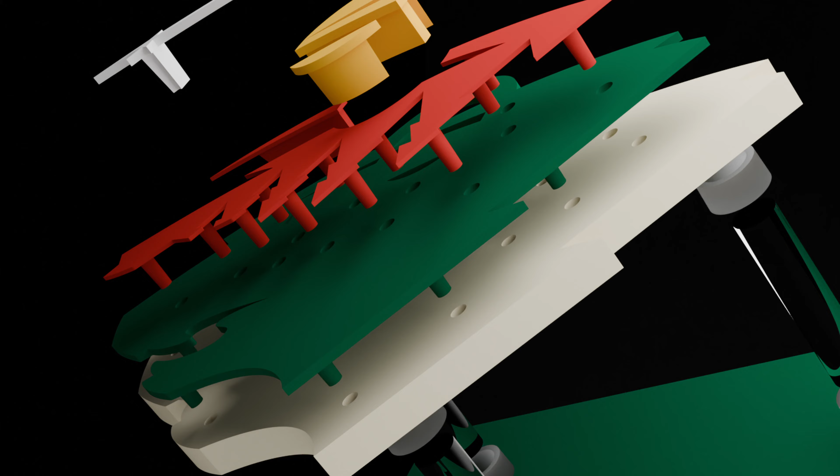Welcome to part 5 of the floating logo sign tutorial. This will be the last part of the series.

There will still be other videos that I'm going to make after this to do some other examples of the design. Those may be a little faster paced, and I'll point out anything that's good to know with more complex designs. Obviously, this one's pretty simple, and I chose it to be that way just for the initial tutorial. But I will do a couple more that are a little more advanced just to show you more of the thought process and the workflow.

You can go through the first videos to get a better understanding of where we're at, but this will still be a good standalone video for any design going from Fusion 360 to Blender for rendering. So we will get started with the actual exporting in Fusion 360. Before we do that, we've got a couple more things to do.

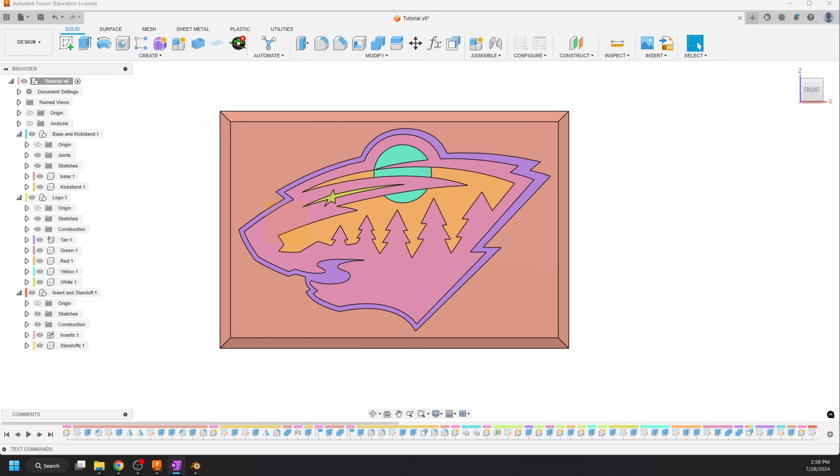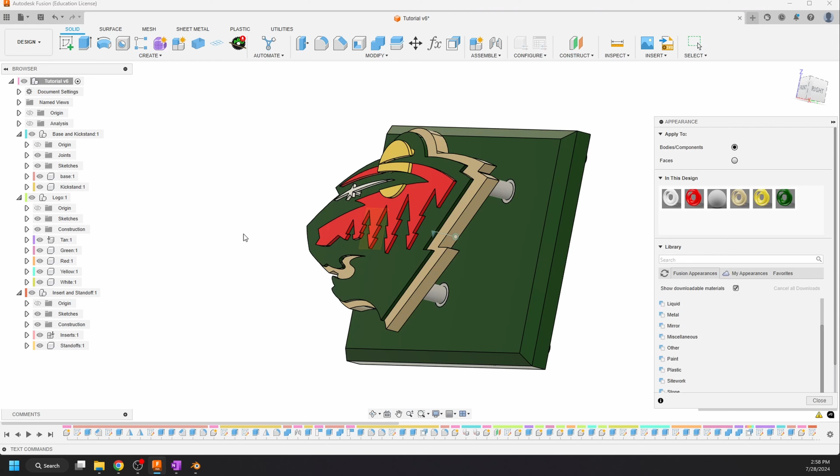I did go ahead and design the standoffs and the inserts for all of the holes. That way they can be exported into Blender as well and be part of the render, just to make it look a little nicer. So since we added those, let's go ahead and add the appearances to those so that they transfer over to Blender. So we'll hit A for appearance.

And you can see over here where I made the insert and standoff component. Within that component, I have a couple of parent folders in there as well that hold the individual bodies. And that way, again, I can drag the material over to the entire folder and it will apply that material to all. So we can go to Fusion Appearances.

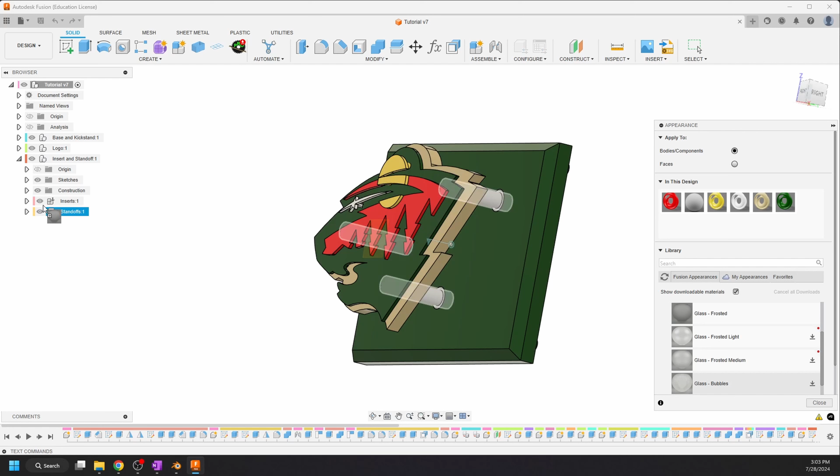And it does not matter at all what you choose over here. We can do glass frosted for the inserts. Really, you're just looking for the name to transfer over, and that way it keeps track over in Blender, which you'll see more what I mean when we get there.

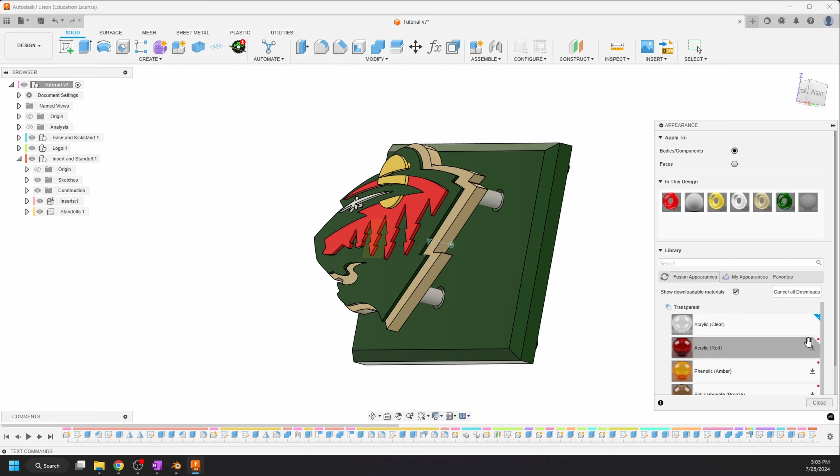And then, just to really distinguish this, we'll go to plastic, transparent, and we'll do the acrylic clear. And that'll be for the standoffs. So you can see that that applied well. That is it for the appearances. Again, you can hit Shift N to cycle back out and make sure that everything looks good, which it does.

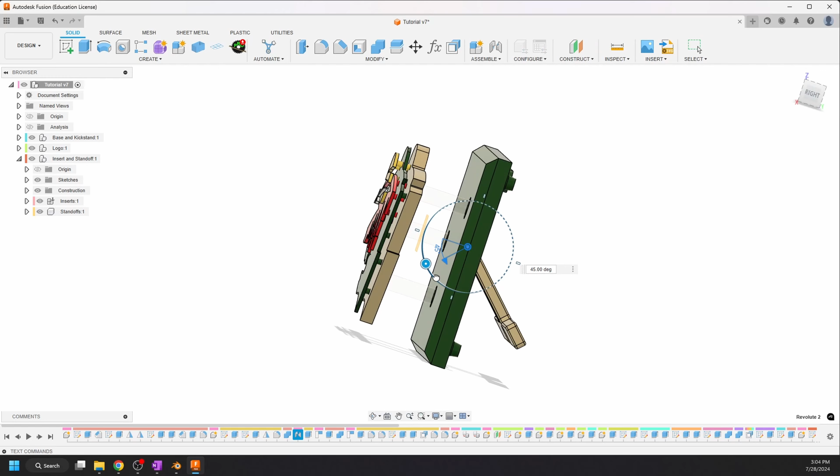The last step before we actually go to export this will be to get the kickstand out. I hit Enter there to confirm that, and now whenever we export, it'll export with the kickstand out. You don't have to do any rigging or anything like that in Blender, which isn't super hard, but it's a topic for another video within Blender, especially if you're not super familiar with Blender. So that's it in Fusion 360.

We will go up to File and Export, and I like to export as an FBX. I found that that's the best file type to import into Blender, as it keeps all the materials, it keeps the naming scheme, and it brings in everything separated. The only downside to this is that it does require cloud translation, which for me takes maybe 20-30 seconds, so I think it's worth the time saved in Blender.

But if you don't have a good internet connection, or if this is taking a longer time for you, you can export in OBJ. The only thing that you'll have to do extra in Blender is actually separate the parts, but it will bring over the color data, it'll bring over the naming convention, so you'll just have to separate all the parts manually, which is not hard at all to do.

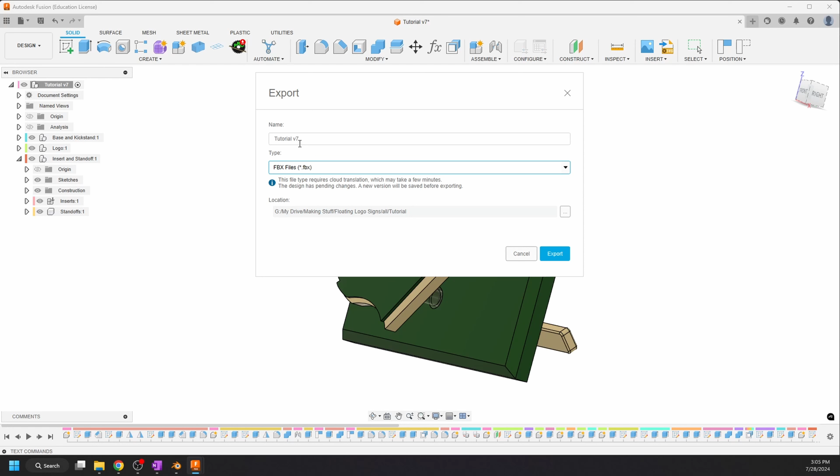So I have a location on my computer, I've got a floating logo signs folder, and I've got my tutorial here, so that looks good, and we will hit export. See how long this takes. Okay, yeah, that took about 30 seconds. So again, easier to wait the 30 seconds and have a more compatible file type.

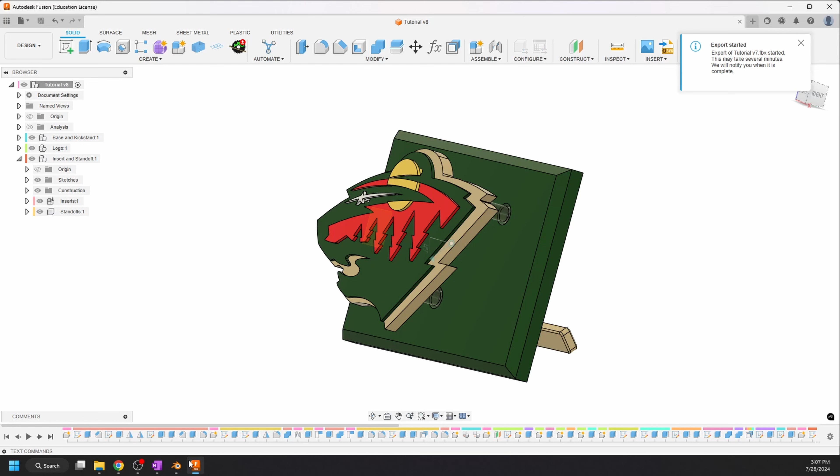I do wish that they would bring that out of cloud translation. I don't know how necessary that is. OBJ used to be the same way, if I can recall, and they just brought that over to local export, which now it's instant. But for now, that'll work. So we will get out of Fusion 360 and we will bring up Blender.

I'm not going to assume that everyone has experience in Blender. It is kind of an overwhelming software, but it's insanely powerful. I've got probably a couple years into Blender, and I maybe know 20%, 30% of what this program offers. So there's a lot to it. So we're just going to focus on the exact steps to do this.

Again, it does not have to be the floating logo sign. This will work on any design coming from Fusion. But we're just going to work on initial setup just for this rendering portion. And we're not really going to dive into anything else because we could spend hours and hours on Blender. There's loads of good tutorials out there, and I may end up doing some in the future as well. So we'll just focus on the rendering of this sign.

So the first thing that we're going to look at is just basic setup of Blender and your scene, just to make sure that you are rendering as quickly as you can and high quality as you can. This is all based on your computer, so if you have a slower computer, it's just going to be slower. But I will go through my settings here, and on the right hand side you will see your settings window over here, and we'll start out at render.

So click on this render tab, and I always render through Cycles. Lighting looks a lot better in Cycles versus Eevee. And change this to GPU compute. That way it uses your graphics card to render instead of your CPU, which is always going to be faster no matter what. Even if you have a bad graphics card and a great CPU, it's probably still going to be faster. So GPU compute.

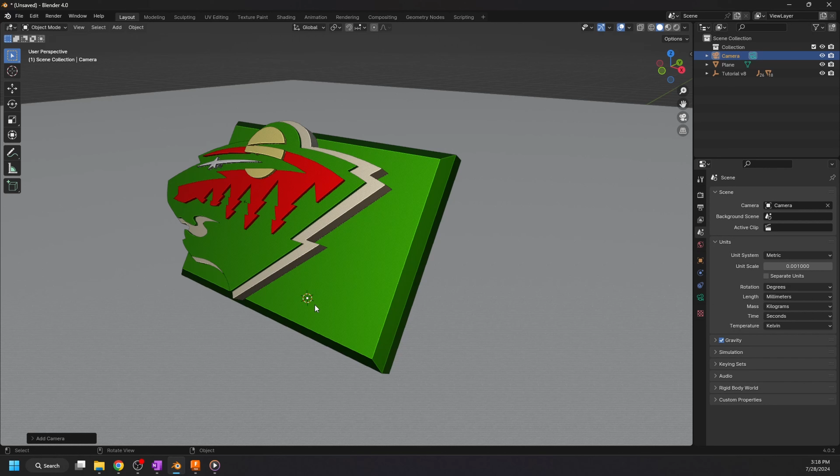I hit Shift A again for adding a component. And we're going to go ahead and add our camera. Again, the camera is going to come in here. It's pretty small. You can hit Control Alt 0. And what that will do is it will put your camera view exactly where your current view is.

If you hit N again to bring this bar back out, and you go to view, you can do camera to view. And now, whenever you scroll or you manipulate your view, it's going to keep the camera up. And your camera shortcut for turning on and turning off is going to be 0 on the numpad. So that looks pretty good. And we'll hit 0 to get out of the camera view, but you can see that our camera is still right there. Anytime you want to go back into your camera to see how it looks, just hit 0 and it'll bring you back. Okay.

Now we are going to go up here to render view. Render view is called viewport shading. This is going to show you kind of exactly what it's going to look like when it's rendered. So you can see it's pretty fuzzy, and that's because it's doing its render. Again, you can see as I move around, you can see up here the sampling, and I have it set to 20 so that it's not just killing my computer for no reason.

I'm going to go over here to world, and I have an HDR that gets loaded automatically, but a lot of times I don't like using that. So no matter what you have loaded, you can just go to strength and go to 0. Now we have a completely dark world. And then we'll do Shift A for add. We'll add a light, and we're going to add an area light. Again, it comes in selected.

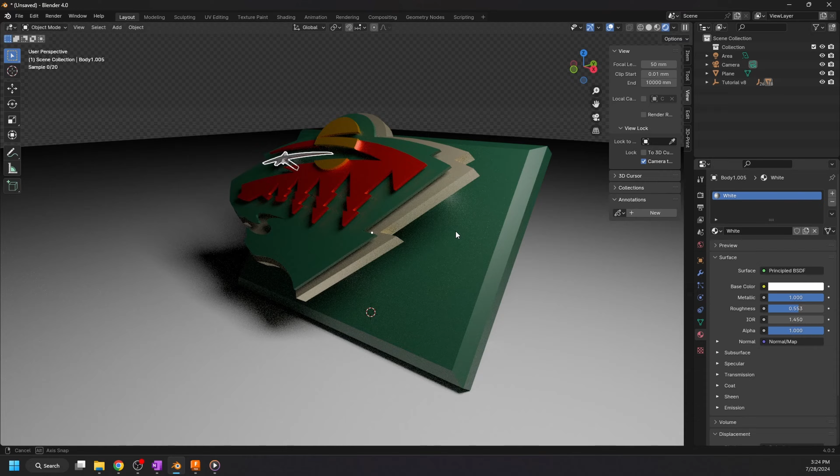And then we can go through and do the exact same thing. We'll do it for tan, eyedropper over to tan, yellow. Now you can see this one has two components, but they're both assigned the same material. So if we make a change to this material, it's going to update on both. So we'll go to yellow, bring over the eyedropper, and then white is white. I'm not going to worry about that one. So that looks good. We have all the colors assigned.

For these two, we'll go to the insert. And we're going to change this from principled BSDF to a translucent. Again, I usually print these with a clear TPU. So it results in kind of a translucent, definitely not transparent. So that's fine. Or you can change it to whatever color you're planning on printing it. And then we'll select the standoffs. Instead of principled BSDF, we will go

to refraction BSDF. And here, we'll bring the roughness all the way to 0. And you can see how that results in a really nice acrylic material. It even has the pass-through information for what's behind it. Okay. And as far as materials are concerned, I think that looks pretty cool. And actually, this is a pretty cool shot here.

So you could go 0, and then come in, do something like this, a little more dramatic. Again, you can set it up exactly how you want to set it up. I think that looks pretty cool. I think I'll stay there. And that is about it. At this point, you can hit F12, or you can go up here to render and render image. Right now, I can tell you that if you see this checkerboard pattern, that means that it is not going to render. This is going to be transparent. It's not going to render that.